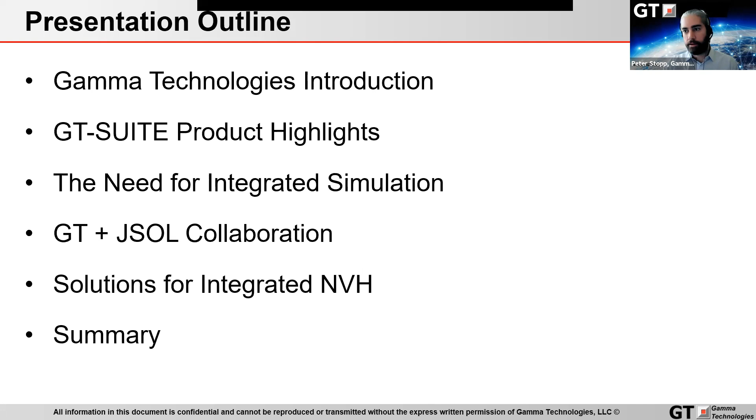Okay, so Gamma Technologies, not every one of you might know the company. We are a software development company headquartered outside of Chicago in the US. We were founded in 1994 with the goal of providing system-level multi-physics engineering software. Since then, we have expanded our offices to Europe, so Stuttgart, where I'm located, but also to India, and are represented in the Asia Pacific region by IDAJ. We have a singular focus: the development and support of the GT Suite software around the globe.

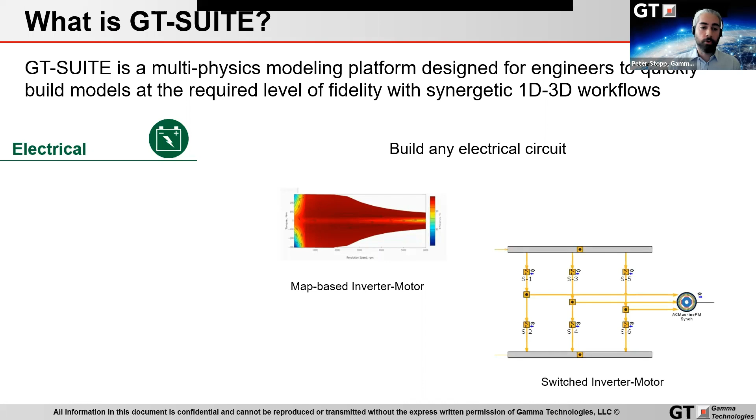Our only product, GT Suite, is a multi-physics modeling platform designed for CAE engineers to quickly build models at the appropriate level of fidelity to solve the task at hand. GT Suite contains electrical libraries to build any kind of electrical circuit, including map-based inverter motor subsystems for complete vehicle energy assessment, but also switched inverter motor assemblies if you look into motor drives and NVH.

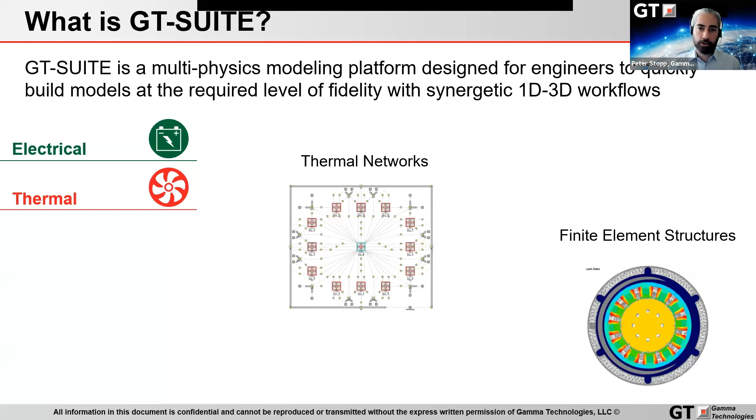The software also models thermal systems, such as thermal networks of motors and battery assemblies, and these models can be represented in different levels of fidelity, starting from the lumped mass models we see on the screen, up to complete finite element structures, and also coupled with the electrical and fluid flow solution.

Speaking of fluid flow, the flow library is built upon a 1D CFD approach, so we're solving Navier-Stokes equations in one dimension. So predictive modeling of effects such as priming and also two-phase flow is doable and easily handled with the software and solver. For model building, we offer seamless integration with CAD for easy conversion of CAD models into CAE models.

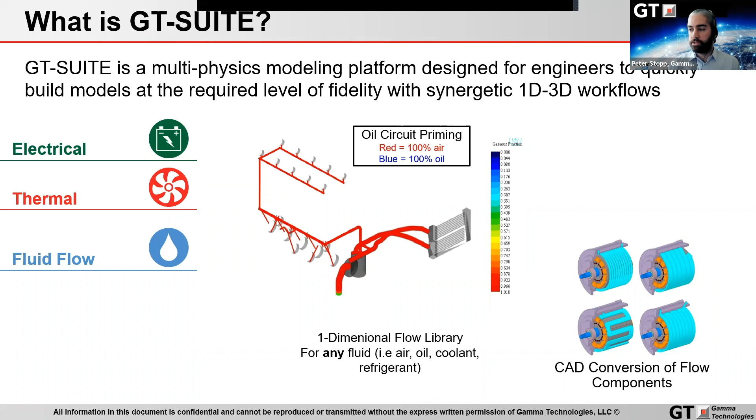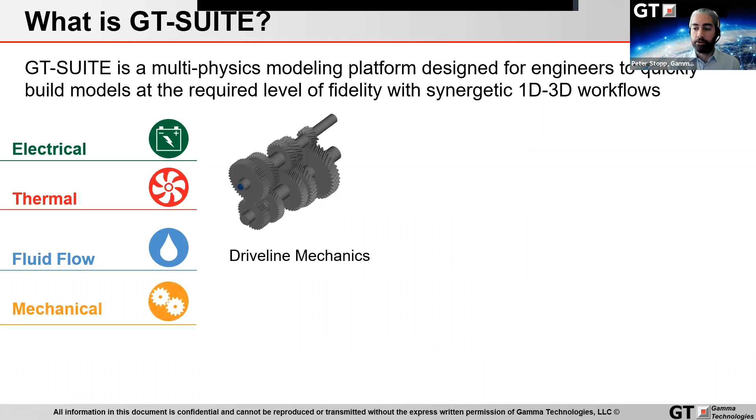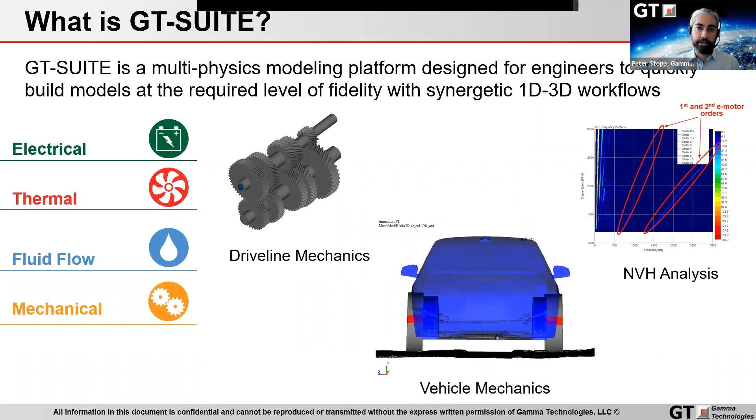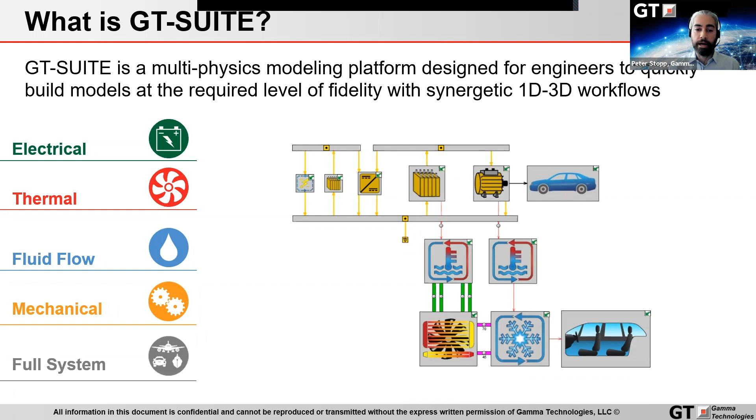These models can now be coupled with mechanical models. For example, driveline mechanics and vehicle dynamics can be captured, all the way to the higher frequencies important for NVH investigation. Since GT contains a mix of deep physics together with system-level capabilities, we have worked to provide users the capability to develop the next generation of powertrain and vehicle architectures.

Working with many customers in different market segments and geographical locations, we have seen one common theme, which is the increasing need for closer collaboration between the different departments. And as electrification now brings new powertrain challenges, together with pressures to decrease the development times, increase the overall powertrain efficiency, and also decrease cost, the need for this kind of collaboration between the different departments is higher than ever.

However, we have also seen that traditional workflows and processes are decoupled. So the motor experts typically work largely in isolation from other teams, such as the control, the thermal, and also the NVH engineers. They typically need to integrate the motor in their complete powertrain system. And this decoupledness doesn't help here, certainly. So these teams are typically only exchanging component requirements and inputs and outputs.

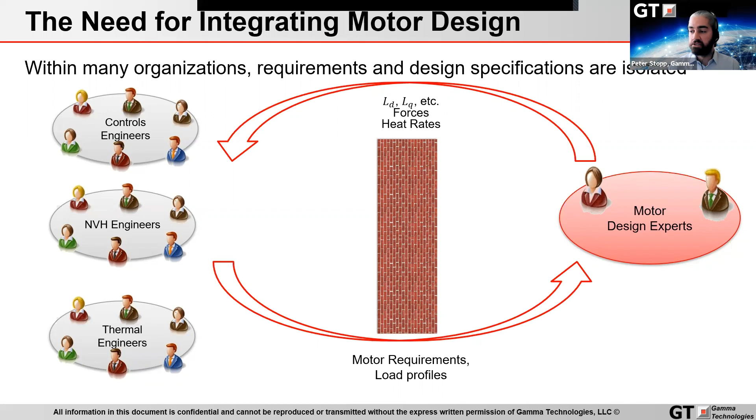While this way of working has historically yielded appropriate results, it is inefficient and suboptimal as information, assumptions, and models are not shared across department boundaries. And this really leads to redundant, sometimes even incorrect work.

Now, in coordination with JSOL, we have developed a more streamlined approach suitable for every stage of the development process, starting with the system level analysis for electrified vehicle architectures. At this stage, the motor representation is typically efficiency maps, which characterize the motor behavior as a data-driven model. And this type of model is useful for determining component sizing and overall powertrain efficiency. For this stage, we have integrated JMAG Express Online into GT-SUITE.

As the program develops, models with more predictiveness and fidelity are needed, and in motors, starting by defining the motor architecture, which meets the vehicle level requirements. And for this stage, we have direct import of motor behavior specifications from JMAG.

Eventually, detailed 2D and 3D electromagnetic analysis must be accomplished. And for this level of fidelity, GT relies on established partnerships with the tool of choice used in the industry, JMAG Designer. These electromagnetic models can be reduced to represent the mechanical and thermal behavior of the motor for the purpose of control, thermal, and mechanical integration.

Eventually, these final design models are reintegrated into the complete vehicle system for MIL, SIL, and HIL calibration via JMAG RT. And for my presentation today, I will concentrate on the motor integration topics, specifically for NVH.

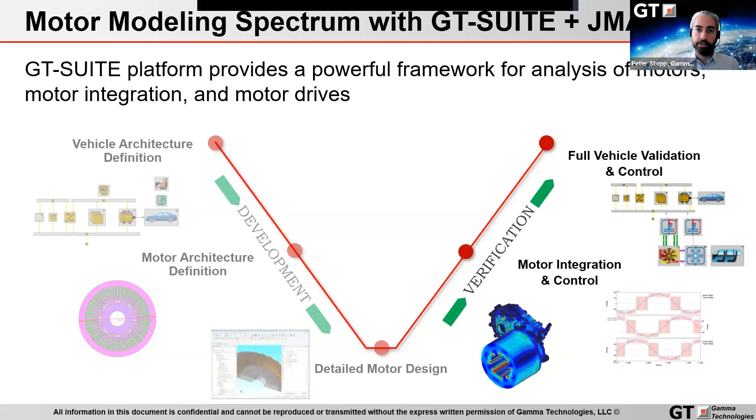When we look at NVH phenomena, these can be broken into different areas depending upon the frequency range. So typically vibration problems are lower frequency and can be solved by using 1D multi-body dynamics approaches. And some of these phenomena include vehicle shuffle, judder, and clunk. Other phenomena require either a fully 3D or a coupled 1D-3D approach, such as rattle, imbalance, and boom.

And as frequencies reach higher levels, higher fidelity models are required, typically in the form of finite element flexible bodies. These can basically include phenomena such as clunk and whine, which manifest themselves not as vibrations felt by the occupants of the vehicle, but more like an audible sensation.

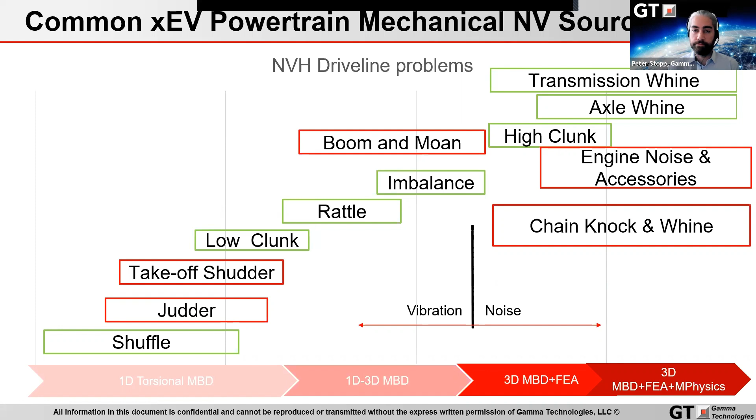When we now look holistically at next generation vehicle and powertrain architectures, and in particular at battery electric vehicles, we can identify that the noise footprint of those vehicles is different compared to an internal combustion engine powered vehicle. This is specifically true at low vehicle speeds where wind and road noise are typically low, and the electrical, the auxiliary, and also the powertrain noise dominates.

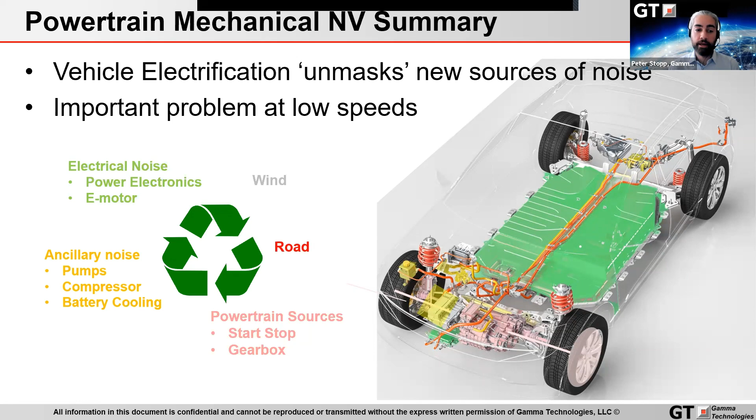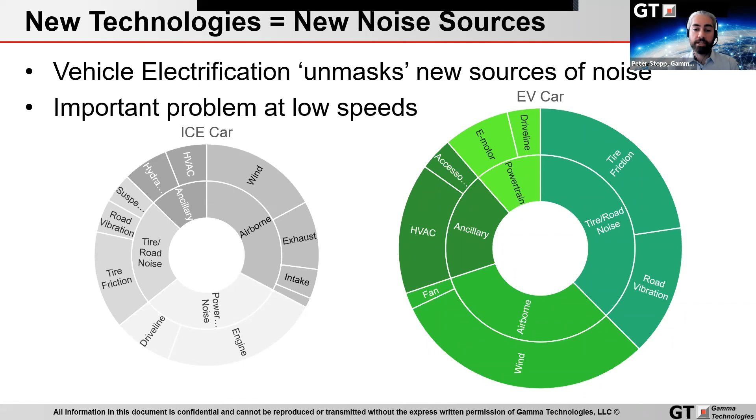Looking in more detail at this problem, we can see that in the case of the combustion engine, many NVH factors were masked by the engine noise. So with this noise now gone, the occupants of the vehicle will experience new sound and vibration sensations. As previously mentioned, these sensations may emanate from the e-motor or the e-axle system, as well as accessories and HVAC systems, which are increasingly important, of course, for cabin comfort, as well as powertrain and battery thermal security.

We've seen that because of this new noise profile, regulatory bodies are taking notice and issuing new regulations on vehicle noise profiles, especially at lower vehicle speeds for the purpose of pedestrian safety. And obviously, this now makes acoustic CAE much more important.

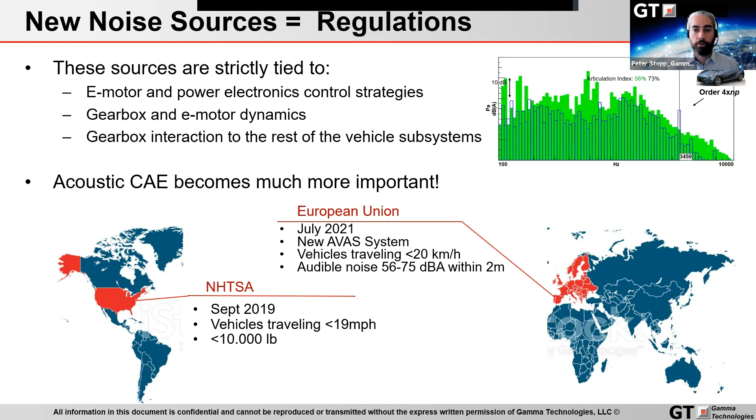The process now to determine these new noise sources is very complex, and it requires a full suite of multi-physics interaction. Starting with the power control unit, the inverter will provide electrical excitation to the motor, and this excitation itself may create a noise in the wiring.

Now, depending on the motor construction and the quality of the electrical waveforms, the motor will respond and magnetic forces will be developed in the stator. These forces and ensuing stator vibration will be transmitted to the powertrain through a mechanical transfer path.

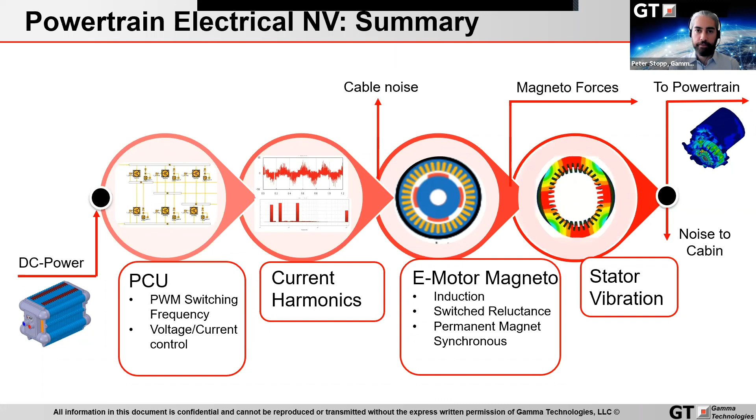The forces from the previous step are then used as boundary conditions for powertrain analysis. And for this, a full multi-body dynamic characterization of the powertrain machinery components must be performed, including submodels for bearings and also gear geometries and loads, shaft dynamics, and different machinery loss models.

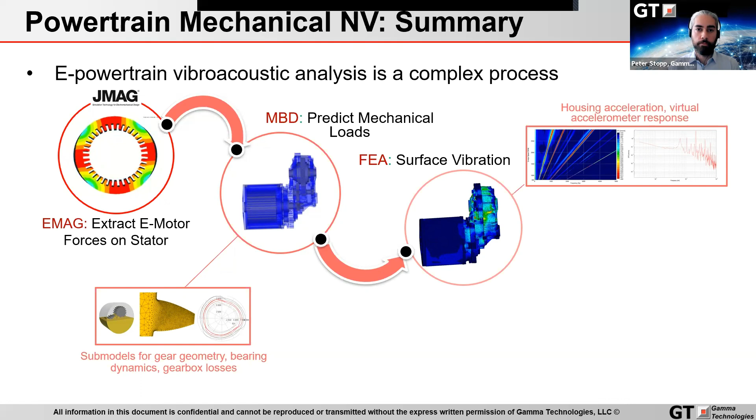Third, a full FEA analysis on the housing structure is performed, reacting from the loads from the magnetostatic analysis and the vibration from the powertrain transmitted through the bearings. And then fourth, in order to understand the radiated noise, there is an acoustic analysis required to resolve the radiated noise field of the powertrain.

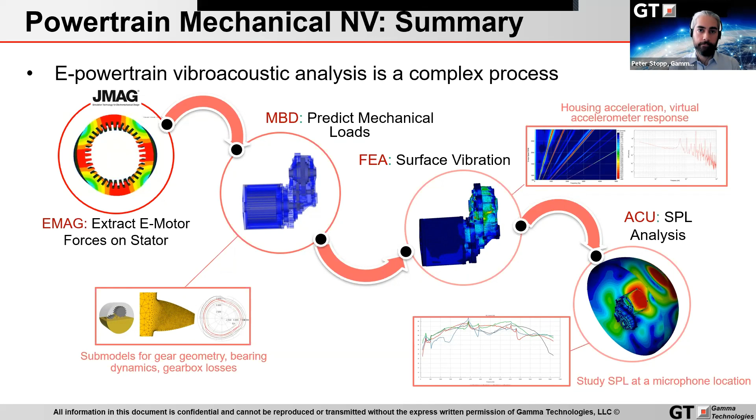Whereas the previously mentioned solutions are part of the GT suite for quite some time now, the acoustics analysis is a relatively new addition to the software. To enable this process, we take advantage of the electromagnetic force output for NVH from JMAG Designer. This allows GT to import the local forces on the stator for mechanical excitation.

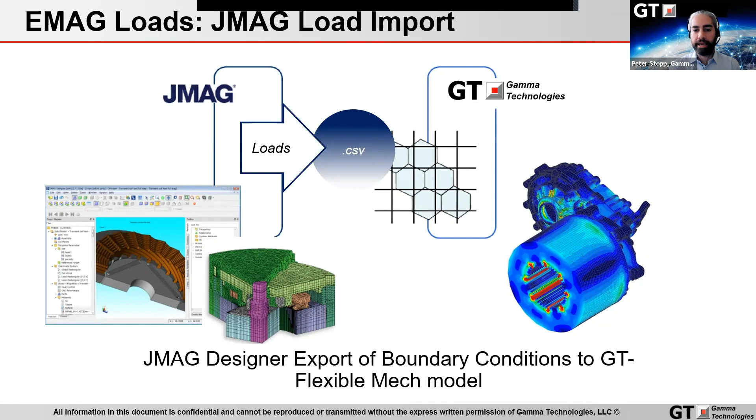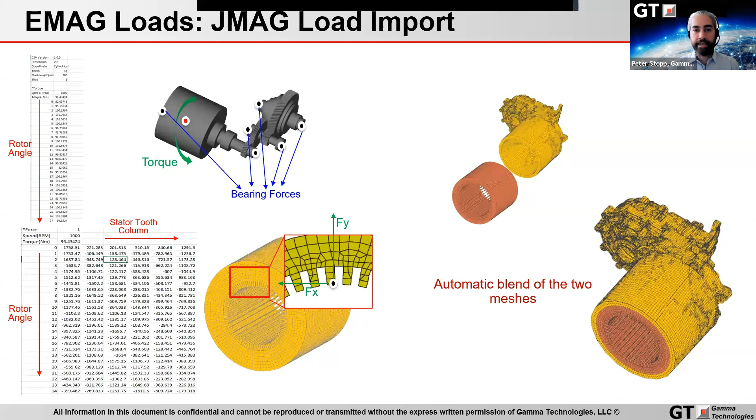The electromagnetic forces files get exported in CSV file format, which GT reads in directly. And these files give the X and the Y direction forces as a function of the rotor angle at each local stator tooth. These forces are then applied as boundary conditions to the stator mesh, which has been merged with the mesh of the gearbox housing in the case of an E-axle here.

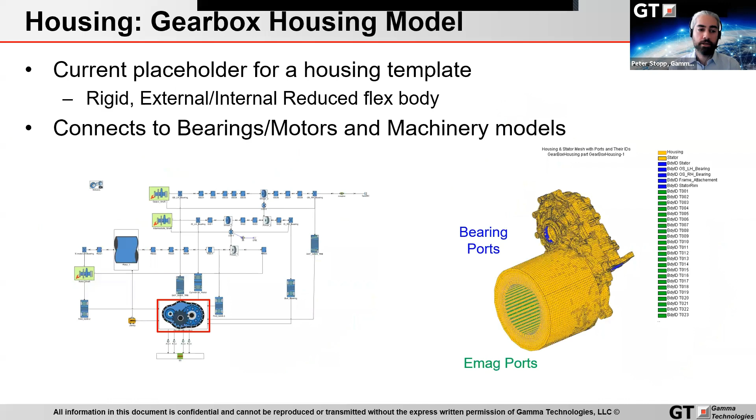The excitation forces from the electromagnetic model act as boundary conditions within a larger model, including the gearbox housing, as well as the gear train, the shafts, and bearings. This allows a one-way coupled simulation such that the forces will affect misalignment of the gears and therefore housing deflections, which are all solved in the time domain. These housing deflections create surface vibrations, which excite the surrounding air and also create noise.

So a future step will look at eccentricity in the electromagnetic solution for a full coupled analysis, such that this misalignment in the rotor due to bearing and gear deflection will also influence the electromagnetic excitation forces.

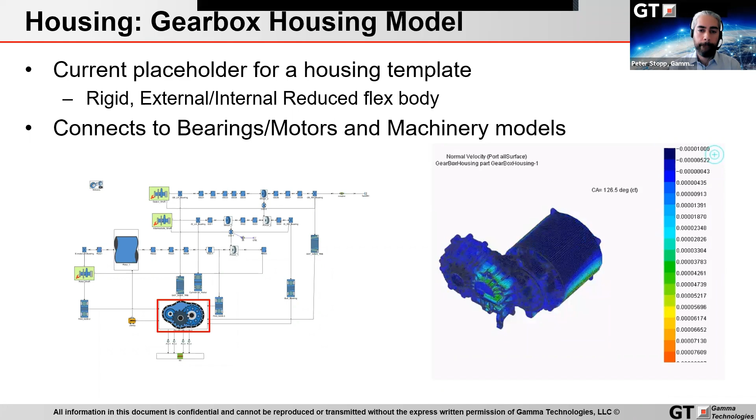As we have now discussed that noise comes from surface vibrations of the e-axle, for example, we need to look in detail at what else, besides electromagnetic excitation, will contribute to these surface vibrations of the housing. Looking at the gears, there are many elements that can cause high frequency harmonics to the gear train, which is used to multiply and distribute the motor torque to the vehicle wheels.

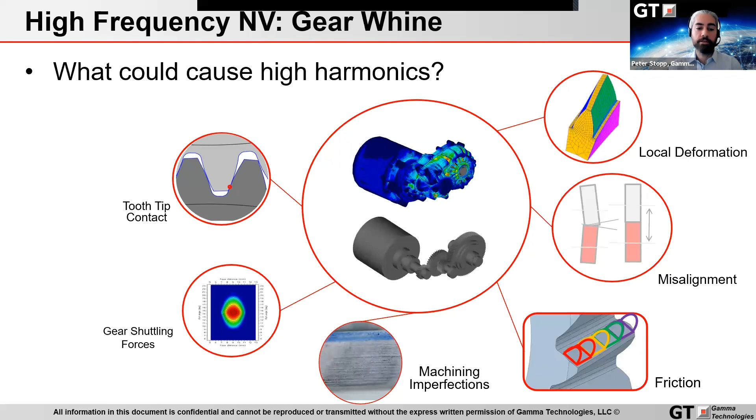And the dynamic phenomena, such as tooth tip contact, the local deformation and the misalignment, either due to installation errors or to the dynamics, as well as gear shuttling forces and friction can be contributors to higher order harmonics. But in addition to that, there are also manufacturing details such as machining imperfections that can contribute to higher order dynamics. It is important to capture these phenomena when looking at this coupled problem.

Of course, gears do not operate in isolation, but typically rather connect to the housing structure through the bearings, which also requires a model. And within GT Suite, we provide bearing models based on ISO standards for various bearing types. These bearings transmit the dynamic loads within the gearbox to the flexible housing structure using condensed nodes.

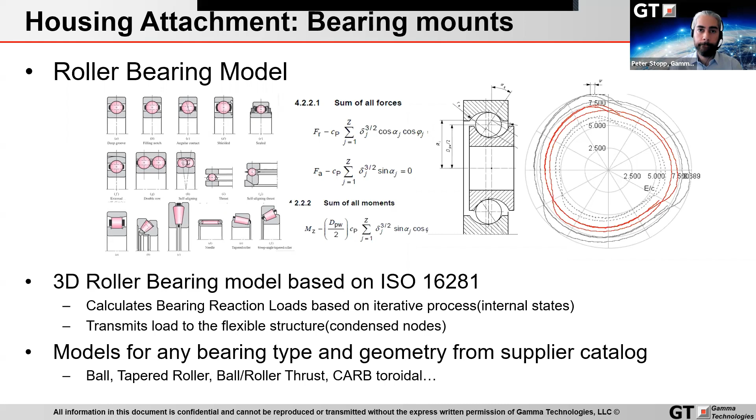To begin to study the vibration for the e-axle housing, we start by extracting the loads on the e-axle housing from the previous coupled multi-body dynamics and finite element time domain analysis, and by taking a fast Fourier transformation of these forces and applying them at the boundary locations, for instance, the bearing locations or stator tooth, we can now make a linearized forced frequency analysis of the gearbox structure.

This allows us to resolve the operating deflection shapes at a particular frequency and allows the user to investigate frequency response at the nodal locations of interest in the form of Campbell diagrams.

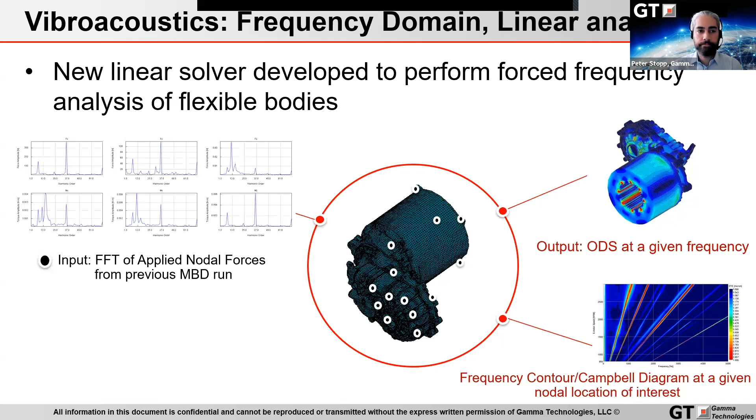Once the operating deflection shapes have been resolved across the frequency range of interest, it is possible to perform the acoustic analysis. And there are various methods to perform this type of analysis. One of these methods is the monopole solution.

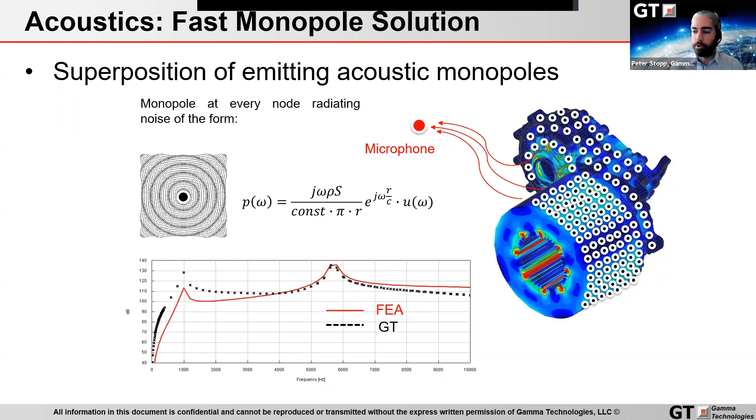Another possibility to solve the acoustic signature of the vibrating axle housing is the wave-based technique. Here, I'm showing our new solution for acoustic performance using the wave-based technique. And the advantage of this technique is that it is accurate and it allows for faster results than some conventional FEM and boundary element techniques.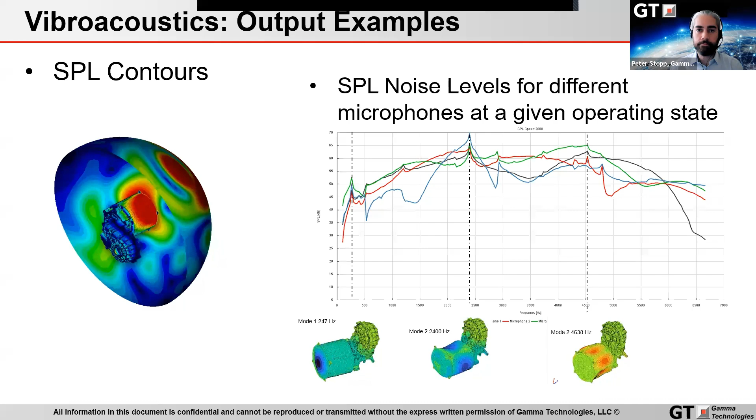On the right side, you can see some operating deflection shapes of the housing at different frequencies, as well as the sound pressure levels associated with those frequencies. So far, I have now shown the GT and JMAG coupled solutions, which allow engineers to model an e-axle assembly, starting with the motor and tracking performance all the way to the system acoustic signature. Clearly, this analysis is very powerful and detailed. However, it does not represent the only solutions that GT and JSOL have tackled for NVH challenges.

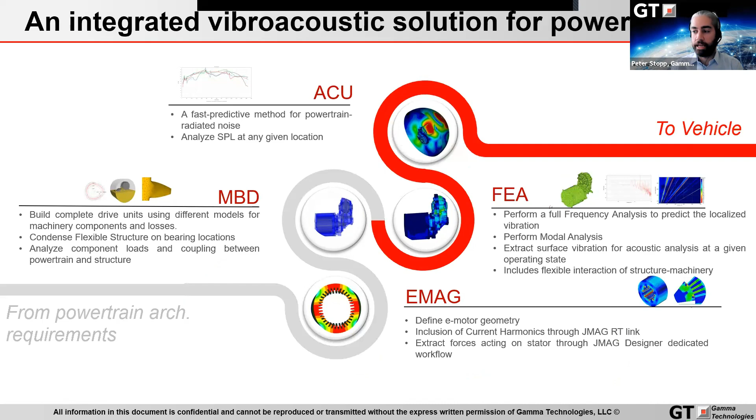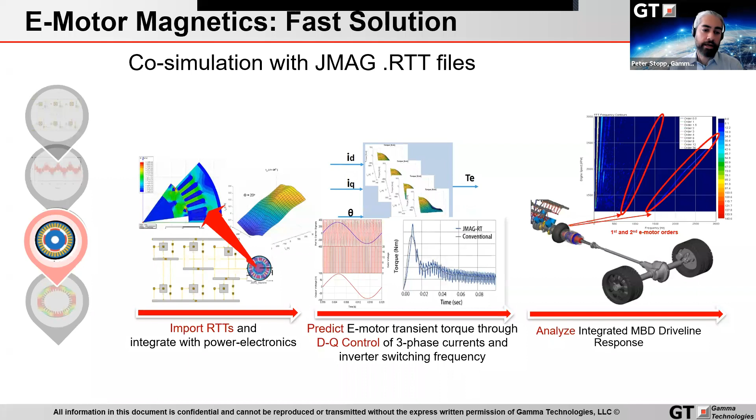As many of you are likely familiar, there is another avenue besides the electromagnetic NVH force export to be used in system models, and this is via JMAG RT. With JMAG RT, it is possible to export the RTT file, which contains rotor angle dependent flux linkage maps. And this allows the GT system level tool to utilize JMAG RT to predict e-motor transient torque, including cogging torque, and we can apply various motor drive technologies such as MTPA, field weakening, and SVPWM to track the motor response at the complete driveline and vehicle level.

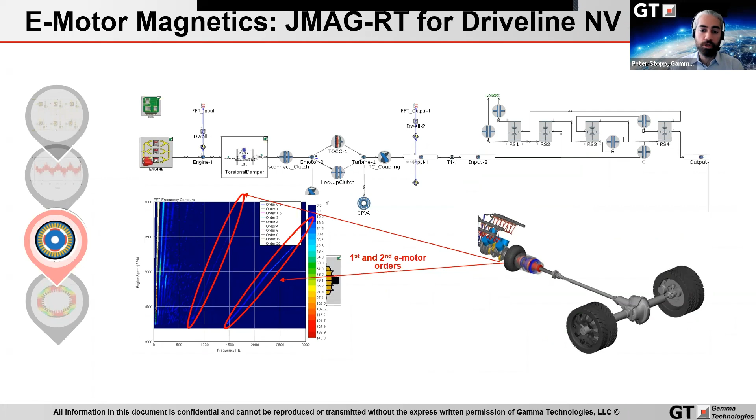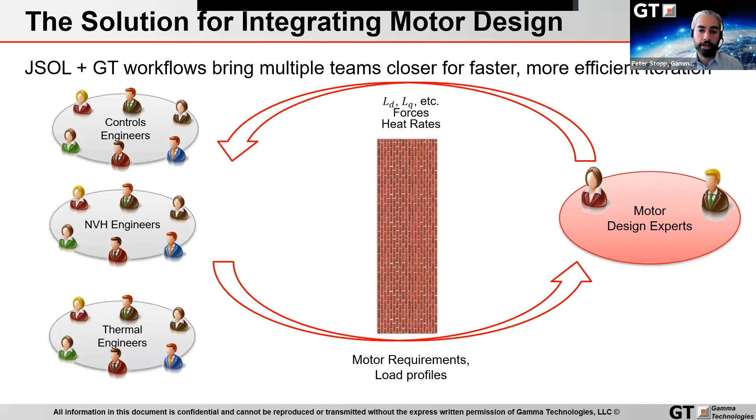In such an integrated model, we can evaluate torsional NVH responses due to engine, motor, and damper interactions. And this allows for earlier, more upfront NVH analysis, which previously has not been possible. Together, GT and JSOL are working to reduce obstacles to collaboration. And by creating streamlined workflows that allow motor design experts to work closely with the integration teams, we have enabled more seamless model and result sharing, which brings efficiency and transparency to the design process.